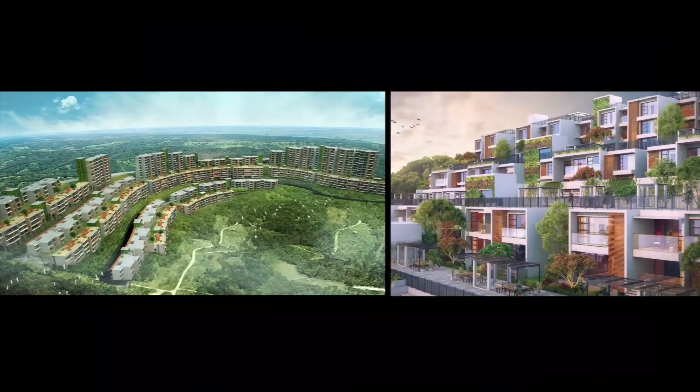So I'll just take you through a few of the projects which will showcase what we have been doing. You can see the resorts which we have done, that is the Kumarakom Lake Resort, one of the earlier resorts which we have done, now rated among the top, even today rated as one of the top 5 resorts in India. Then we have resorts in Goa, which is the Alila Diva. Then we have done projects like, these are some of the residential projects which we have done. Then we have a large residential development, that is the Malabar Montana, which we are seeing now, which is a large residential development.

And the project which we are going to be taking today is the headquarters for the Malabar Group, which is again in the Montana. We will go in detail on the project because it is interesting, because Stapati has been involved in various aspects of that project. We were not only the architects, we had gone into the details of the interior, we did the landscape for that. In fact, we won the National Award for Landscape Architecture by the Indian Institute of Architects for this project. So this is the project where we were involved totally, on various aspects of it.

We worked with our consultants. From the beginning itself, it was important for us that this becomes environmentally sensitive to the place we are doing it. I think the context was very important for us. If you look at the site plan, I think this is an area which was a small mountain which was a little bit away from the city of Calicut.

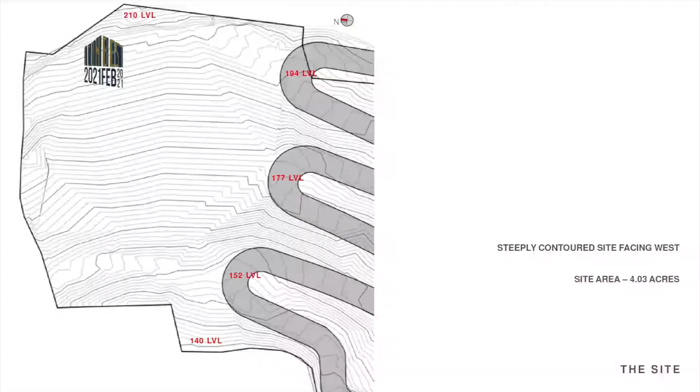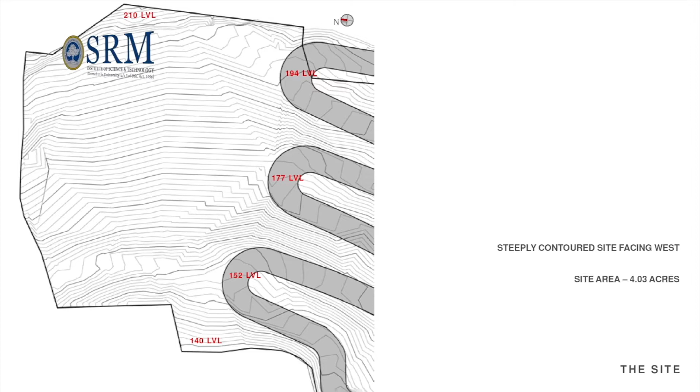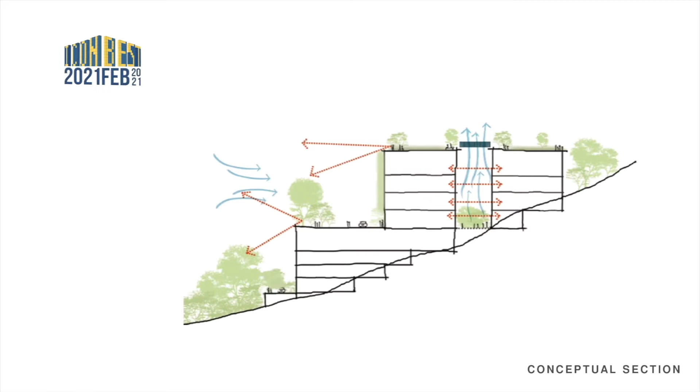The whole site was a sloping site which was facing the west. The slope was towards the west. And so if you look at the section, you can see that the building looked towards the west, and the slope is from the east to west. So we had to design it looking at how we can make use of that slope to our advantage. We had this wonderful view towards the west, but at the same time, it was harsh sunlight which was coming there.

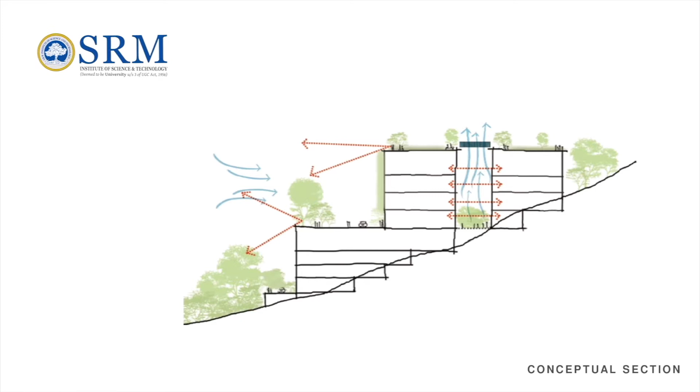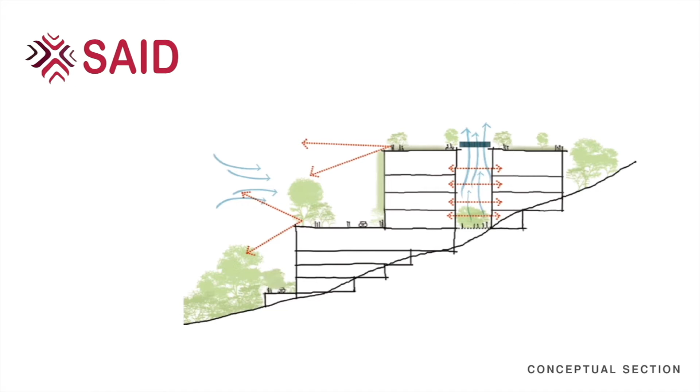Since the site was blocked from the eastern side, we needed some lighting inside for the building block, for the area which we were building. So that led us to give a courtyard space in between the two blocks.

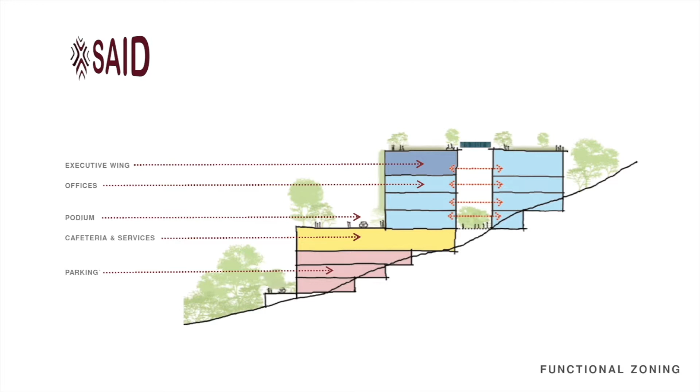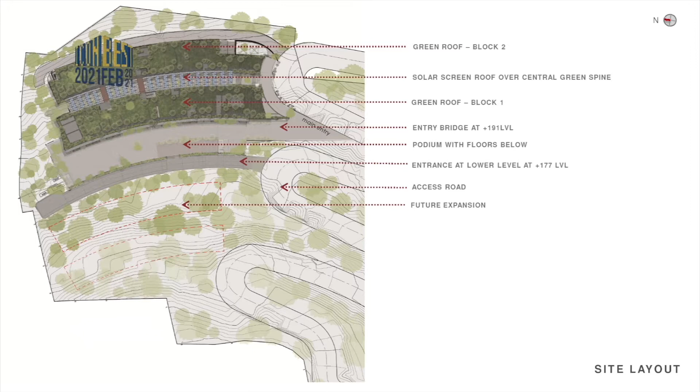As you can see, the building, if you see the zoning there, the blue is the basic office space, the darker blue is where the corporate office is. Then we have some of the cafeteria and other services shown in yellow, and below we had the car parking areas. This is how the site plan is, and you can see how the building is laid out in the site. The area in front is actually the area which has been left for the future expansion.

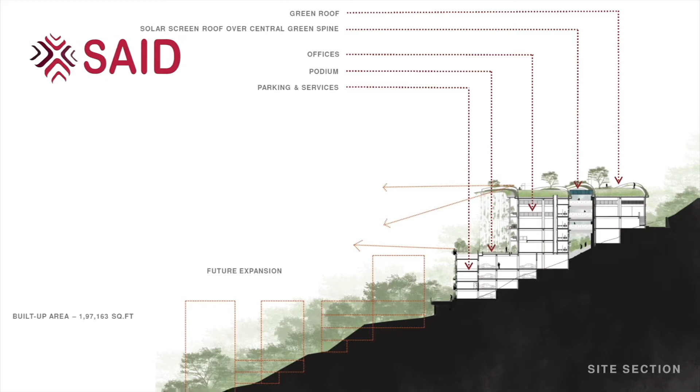That shows the full section of the site. When we designed this, we had to do a detailed study of the site, and we made sure that minimum cutting and filling was done there. We kept it to the base minimum, and in fact, not a bit of earth was taken out of the site or anything was brought into the site. That is how this whole design was done.

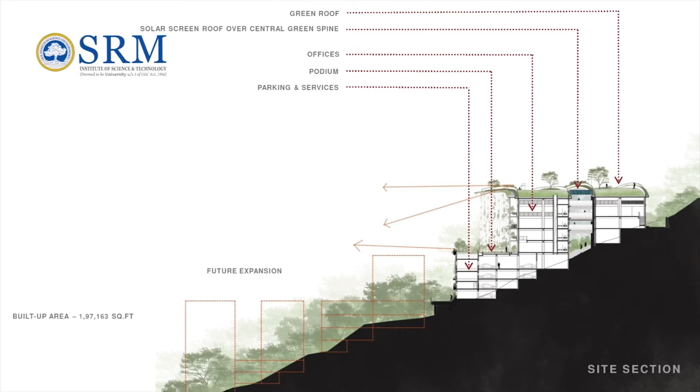What you see in the front are the spaces left for future expansion, and the area in between, which we call the green spine, you can see in the middle, and this is the view which looks to the west.

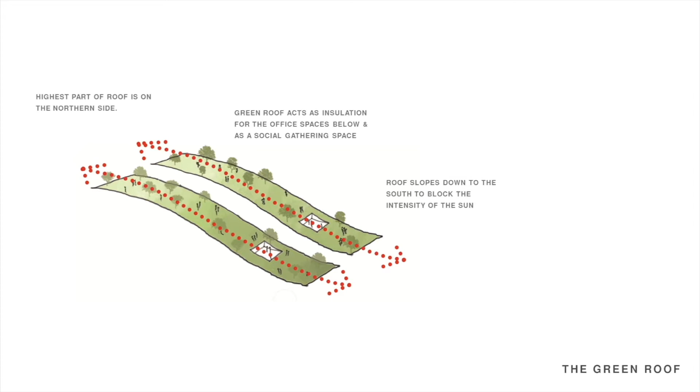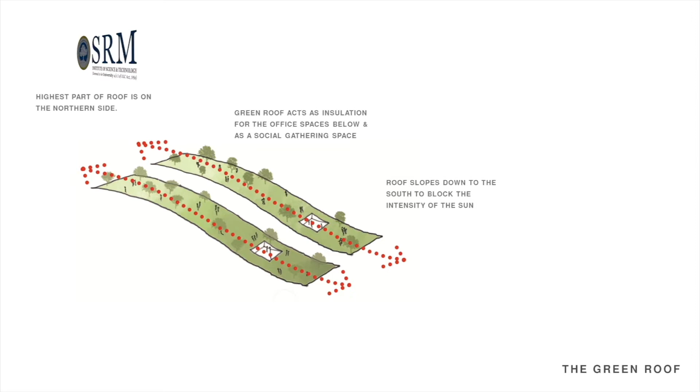What we did was to reduce the heat load on the building and to merge it with the surroundings. We sloped it down. The building slopes down with a green roof which cuts down the heat, and it slopes down, cutting off the radiation from the south. So we have this southern slope where we have the green roof over the building.

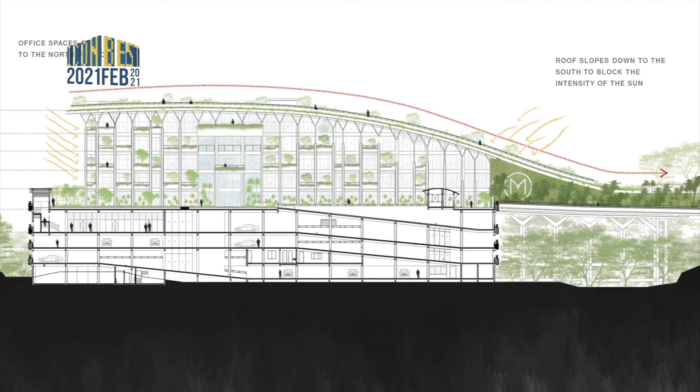This shows a part sectional view of the building. It shows the parking areas and service areas below, and that shows the elevation of the building. You can see that the slope of the building is towards the south.

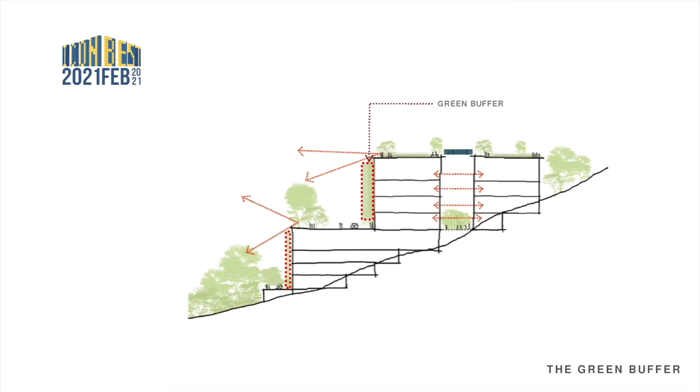One of the things which we did was that we had to cut the tremendous amount of heat coming from the western side. So we designed something which we call the green buffer. The green buffer in a way brought the landscape up to each level of the office floor. It helped to shield the areas from the harsh sunlight from the west, and at the same time we have a wonderful view through this buffer.

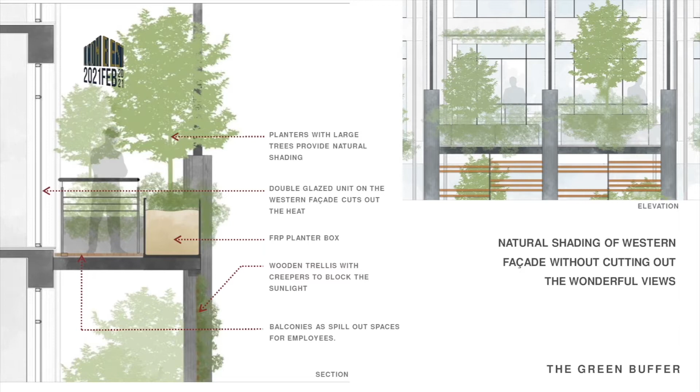This is a section through what we call the green buffer, which is a protruding balcony towards the western side, where we had planters with larger planting, which was an incredible natural shading that cut off the sunlight. At the same time, we could still see the wonderful view there.

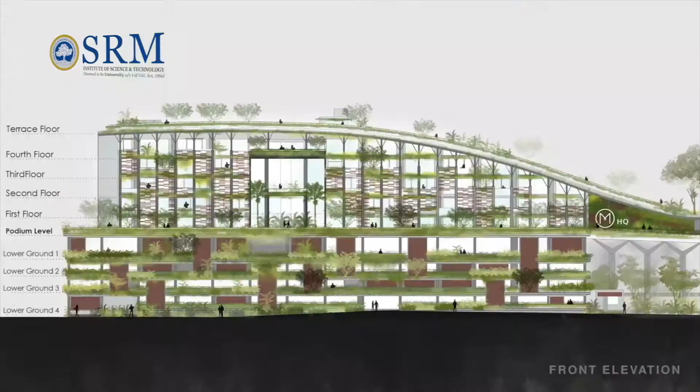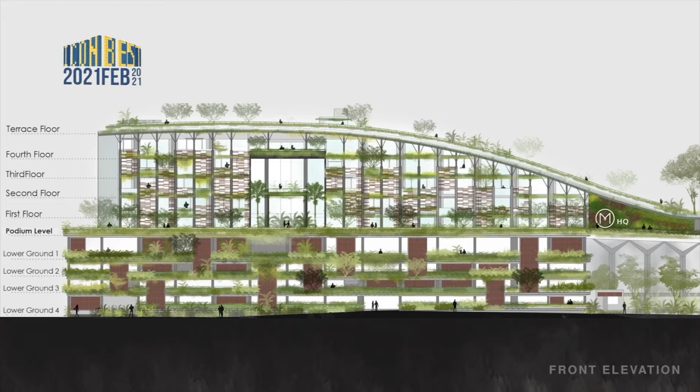So this is how the elevation looks now with the screen and the green buffer. In the office spaces, we have the sliding glass doors behind, but in the parking area we have some partial screens. Otherwise, it is all open with this green buffer there.

So this is the view of the building, the western side, and you can see how the planting is working there. The green buffer worked wonderfully well. It created a wonderful facade, and at the same time, from each floor, we could see the view through this greenery, which brought everybody, even though they were on the second, third or fourth floor, close to the landscape also.

This is the area where we have the parking, and you can see the lush curtain planting there. Once we come to the office spaces, this is the view from there, where the greenery has created a beautiful facade with all the plantings. This is the view from the terrace, what they see when they come out at each level. I think this view is from the fourth floor, but you feel you are there. The greenery brings such a soothing feel to the people working within.

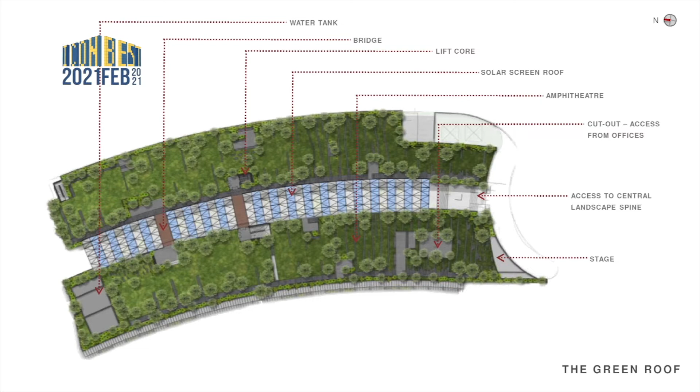And this is the green spine in between. We call it the landscape spine, which comes alive because now we have spaces for people to go out and have tea over there.

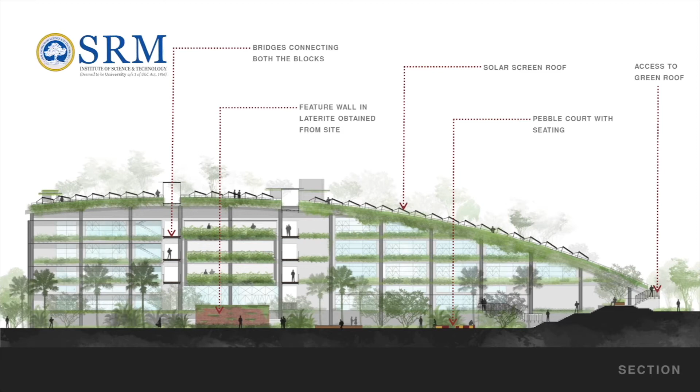This is a section through the spine which shows how we have these bridges in between which connect, and we have the screen there - that is the solar screen, which to a large extent, about 20-30% of the energy needs for that building is taken care of by those solar screens.

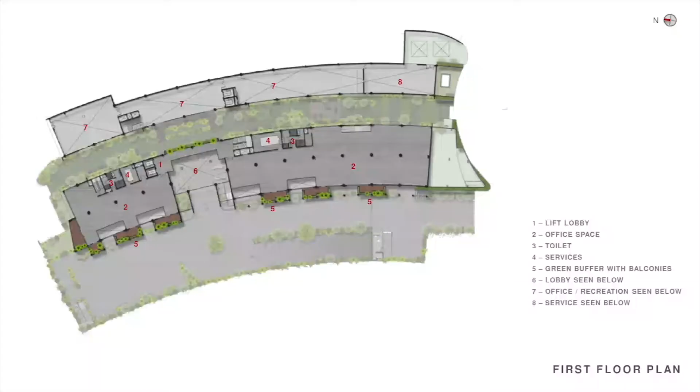This is the first floor, and I will just run through how each floor works. These are all office spaces being used. On the fourth floor, we have the executive floor, and we'll go through some interiors. The flooring is very basic granite, and again we just have a green wall. This is a view from outside the office looking inside, and this is how we see there.

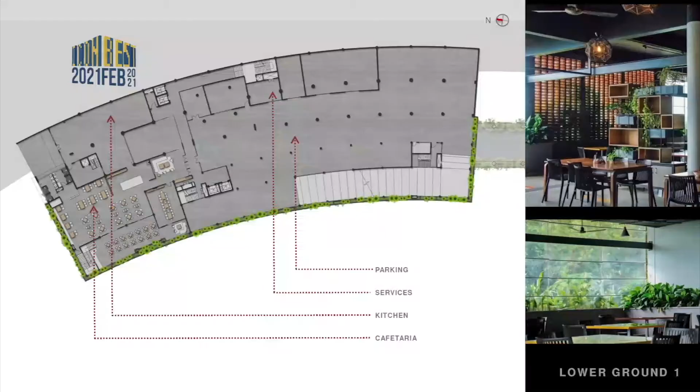On the lower ground, we have done the cafeteria and some of the kitchen there.

In the whole building, for the interior, the spending was minimum - almost nothing. Wherever the flooring was, except for the executive floor, we had this granite. The walls were left free, and most of the flooring was cement flooring, using very basic materials. Ceiling was all exposed, except in certain areas for lighting, and some screens were given. Other than that, the ceiling was all exposed cement itself.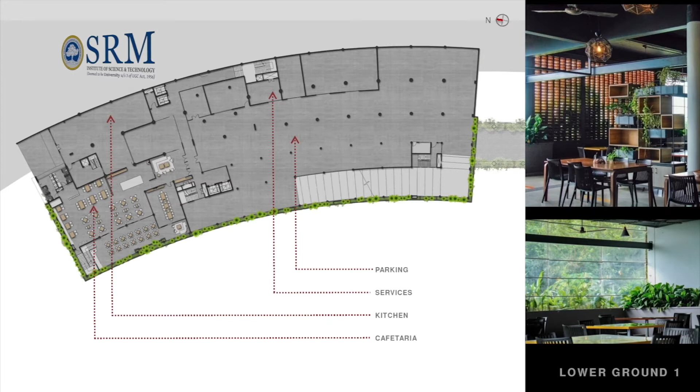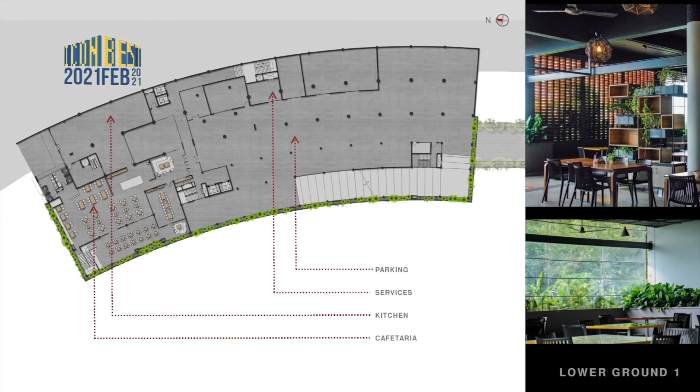Now, I think that essentially shows how the design was totally directed by the site. The site, to a large extent, decided and told us what to do there. I think when we work along with the site, it makes it easier.

I think that was a quick run through the Malabar headquarters there. It is an example of how, if we work along with the site, along with the environment, along with the context, a lot of the solutions come from there.

I think the slope of the land, looking at the orientation, the green buffer which came because of the western sun, to the green spine which was forced because the building needed lighting - because on the eastern side it was a mountain, the site was going up. The screen which we needed in that area led us to have the solar panels there, and having such a wonderful view...

And the site being so beautiful, it helped us reduce the cost on the interior. The interior also reflected how the site helped us in reducing cost and making it more environmentally friendly. Every bit of water has been saved - we have water harvesting happening there. The roof, on the southern side, which we are showing as a slope, cuts off the heat on the slab quite a bit, reducing the air conditioning load. So every which way it helped when you work along with the context.